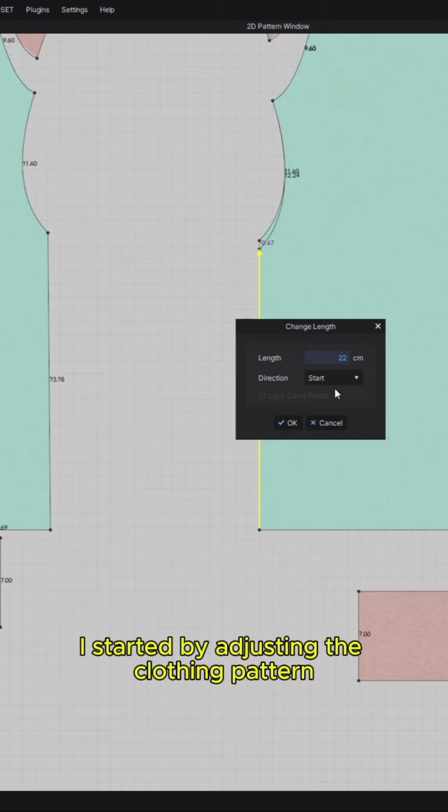I started by adjusting the clothing pattern in the 2D window. I changed measurements, moved points and lines where they should be, and deleted unnecessary objects. Then I continued by modifying the curves of the pocket with the curve point tool.

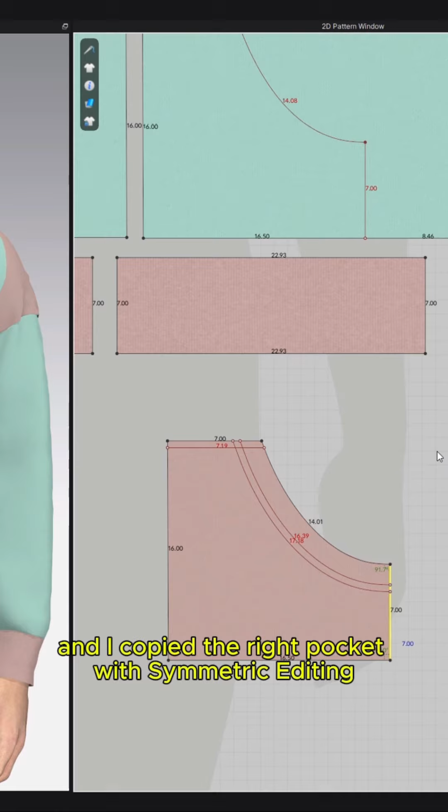I copied the outline of the hoodie pattern and sewed it. I also offset the outline as internal lines for stitching lines. And I copied the right pocket with symmetric editing. I also sewed it to the hoodie pattern and the internal lines I just created.

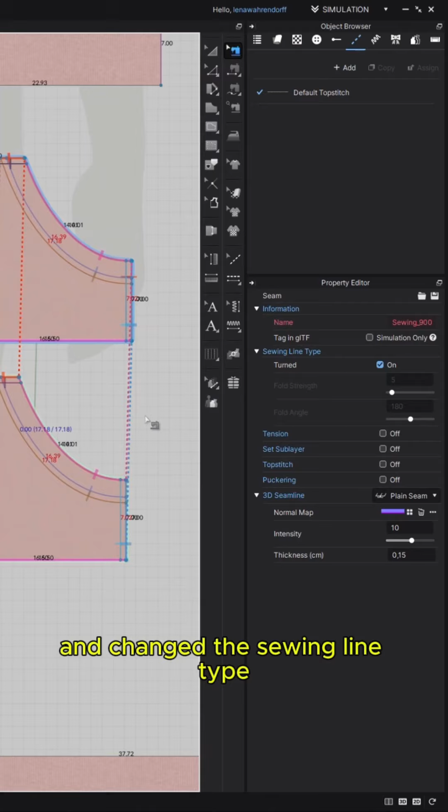To get a nice optic and 3D sewing lines, I cloned the pocket pattern on top and changed the sewing line type. I continued by adjusting the curves of the main pattern design by turning the segment points into curve points and deleting a few to get a nicer shape.

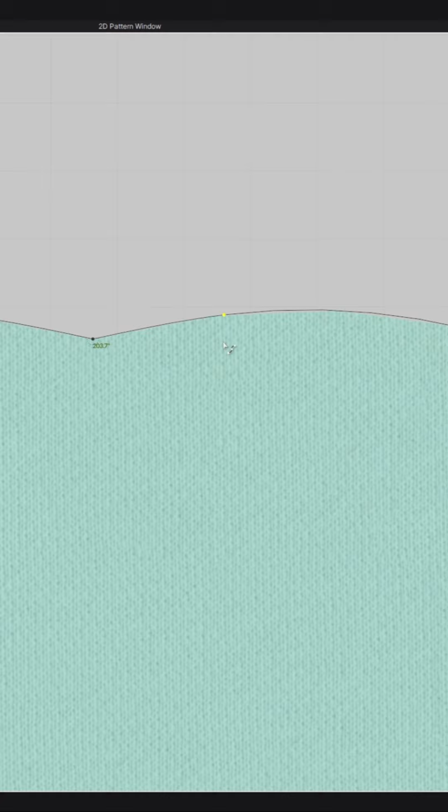Then I created an offset for the stitch line again. And I adjusted the sleeve cap to get rid of this corner. This curve needed to be changed to a 90-degree angle to create a smooth transition when sewn to the back piece. Of course, the back piece has to have a 90-degree angle too.

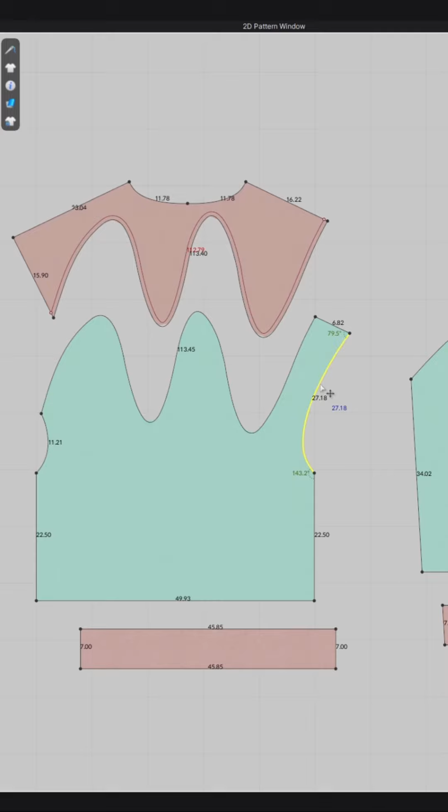The neck hole needs some adjustments too, and the armhole will get some stitch lines. And then I cloned the fabric pieces under and changed the sewing line types. Normally you would sew the seam allowance and create the stitch line, and you can do that in Clo3D, but for me it's faster to just clone the layers and make the fabric half the width.

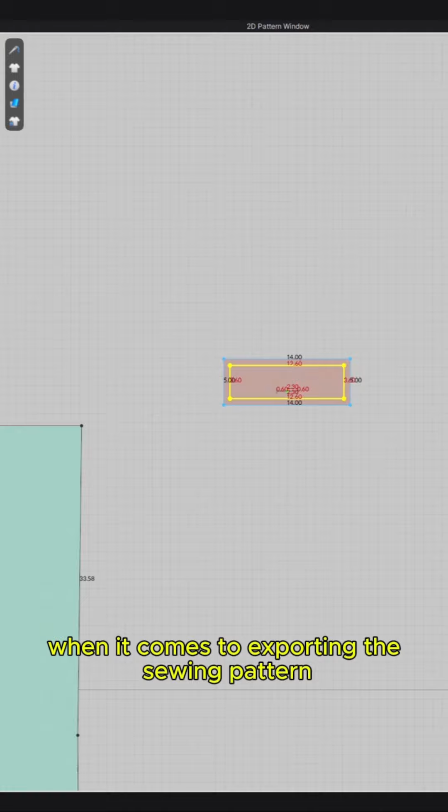So in the end I have a nice stitching effect and it's still the same fabric thickness. I do it for the render and later change it when it comes to exporting the sewing pattern. The same I do for the hood and for the pocket flaps of the pants.

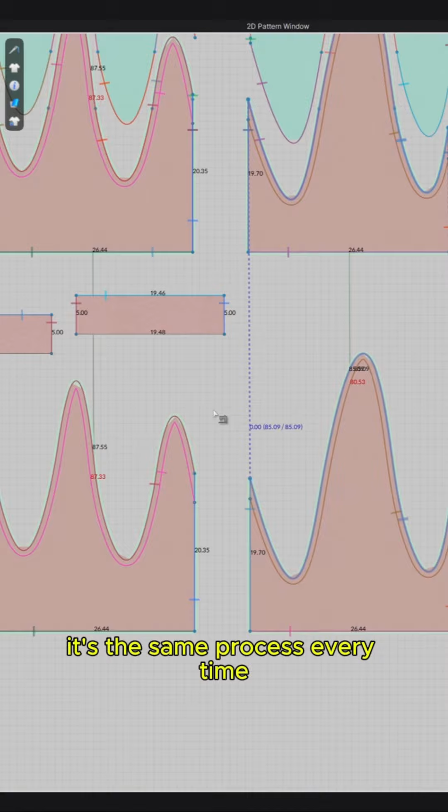Again, I adjusted the curves with the curve points. I just like it more than the handle, that's personal preference. Offset the outline as internal lines, layer clone under and change the sewing line type. It's the same process every time. Now I am lowering the particle distance and simulating the garment for a realistic look.

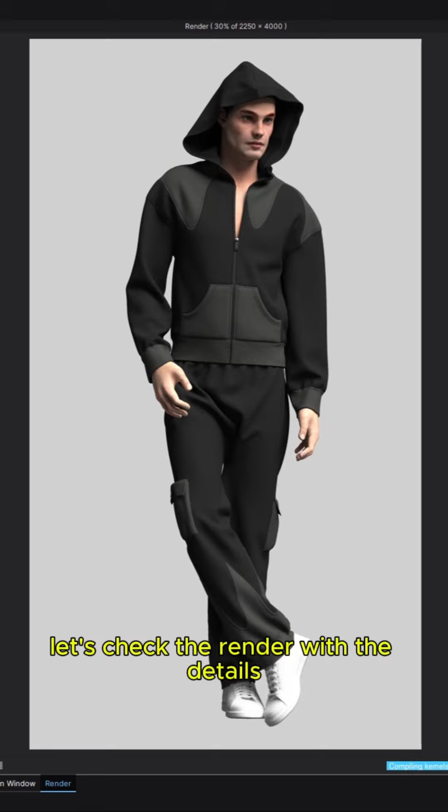Next I adjusted the colors, and I do that in the colorway mode because there I have an overview of all colors for the objects. I tried a little bit around with the colors and I applied stitching to the parts that need it. Let's check the render with the details. It looks already pretty nice. I added a floor and